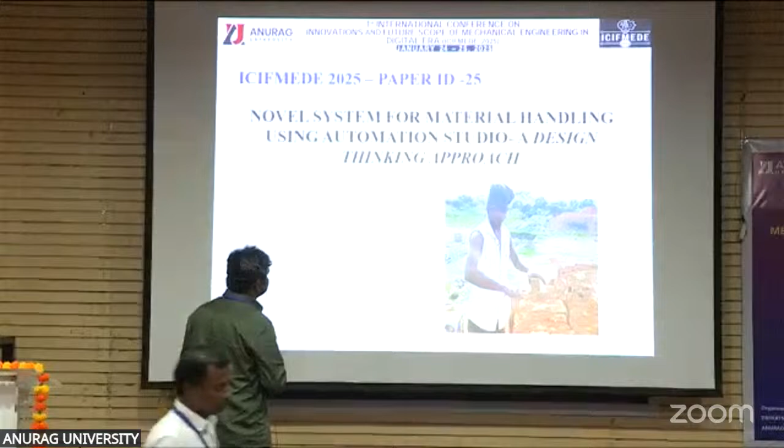I just wanted to share some basic information. Being a mechanical engineer, as sir told, there is AI, but it is not totally applicable for AI to take over mechanical or core departments. So, in line with the topic of AI in everything but not in mechanical, in mechanical, I should be there, we who has to work for the mechanisms.

Ultimately, once you design a mechanism for basic minimum things, there should be minimum contribution from the mechanical engineer in order to design a product. So when you want to design a product, not directly getting back from the engineering aspects, we need to go with a design thinking approach.

What is this design thinking approach? It is a process where you get into the user needs and find out whether it is feasible, viable, and desirable or not. These three aspects are very important in order to design a product.

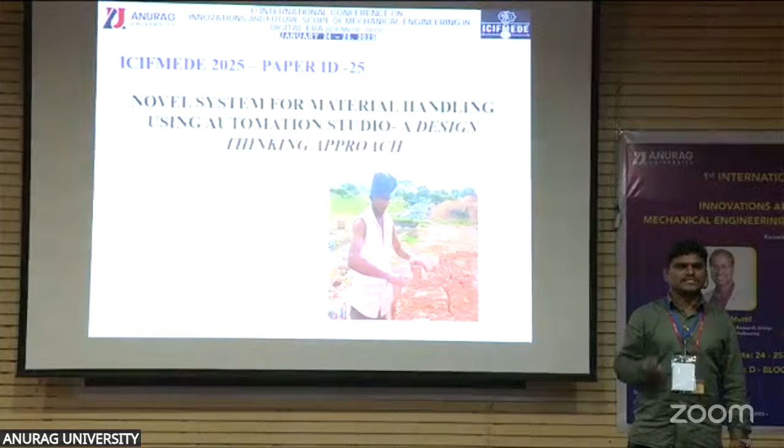This is the work where I have explored novel systems for material handling using automation studio. Material handling, as in the image you can see, is basic work where a mechanical person or a layman is working, but what mechanical engineering contribution can go with this - this is the idea and this is the work.

Getting into this, automation is the era we are in, no doubt about it. So core departments, what we are doing and what is our contribution to society - this is the aspect which every engineer has to question themselves.

Definitely we are here to solve problems in society. So whatever we are doing, the output and conclusion should be to serve the society. This project is going to serve the society and will be helpful by using automation. Again, it leads to AI.

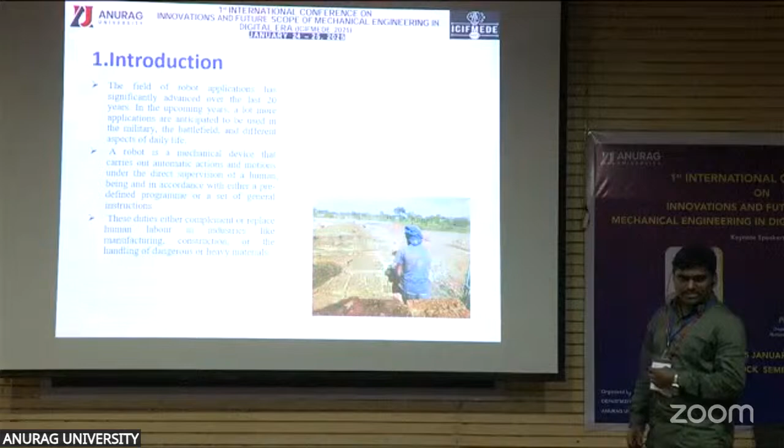Let us see what exactly it is about. The field of robot applications has significantly advanced over the last 20 years. We know that. A robot is a mechanical device that carries out automatic actions and motions under the direct supervision of a human being.

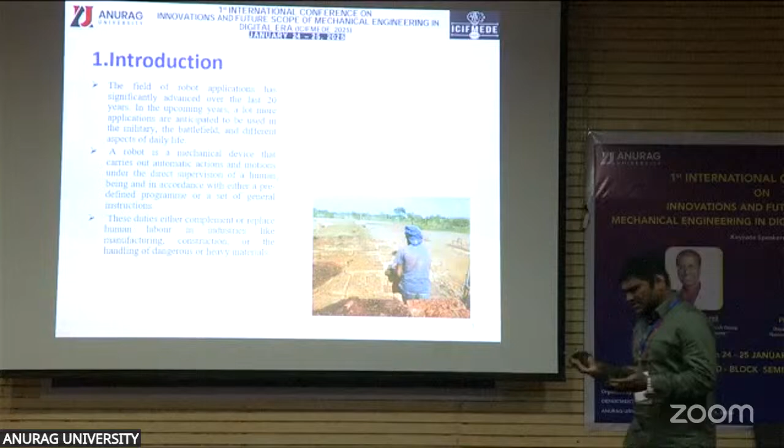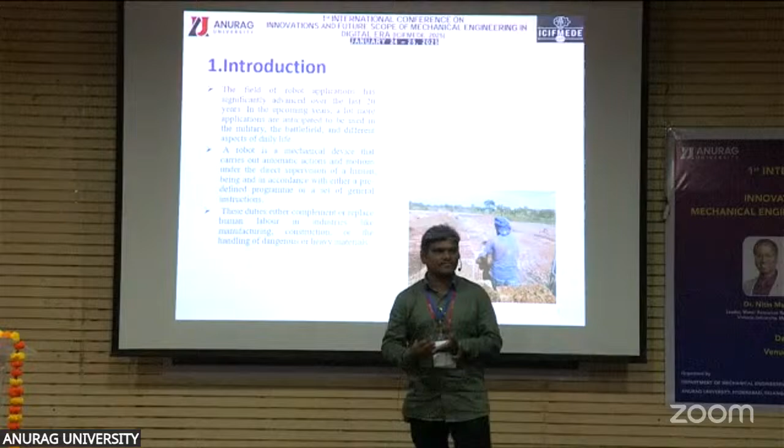Obviously, any automation is nothing but a logic system, from the minds of a human being, no doubt. The only thing is the right path, how you develop a logic, either in the form of PLCs or in the form of an algorithm. The coding system, there are different methods, different means where we can develop any system into automation.

But which one you are using is important, because at the end of the day, whether it is feasible or not - feasible in the sense of engineering aspects as well as economically. These two things are important.

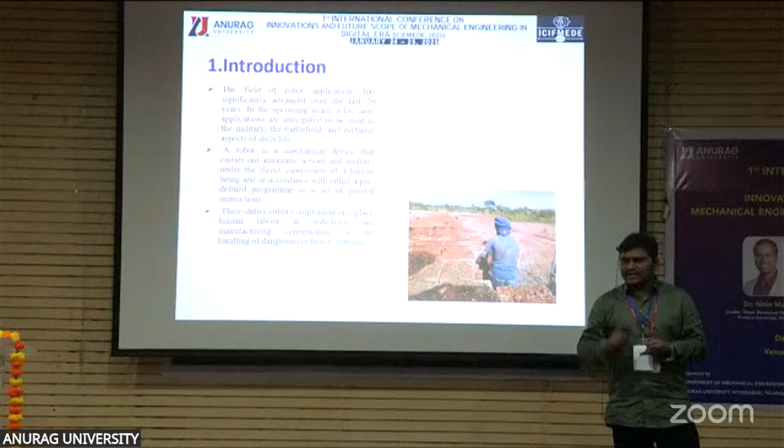And finally, as I told you, desirability. Whether you have a technology and feasibility, but if it is not desirable to the person, then ultimately the product is waste. All these three things have to go together, then only the output will be useful for the end users.

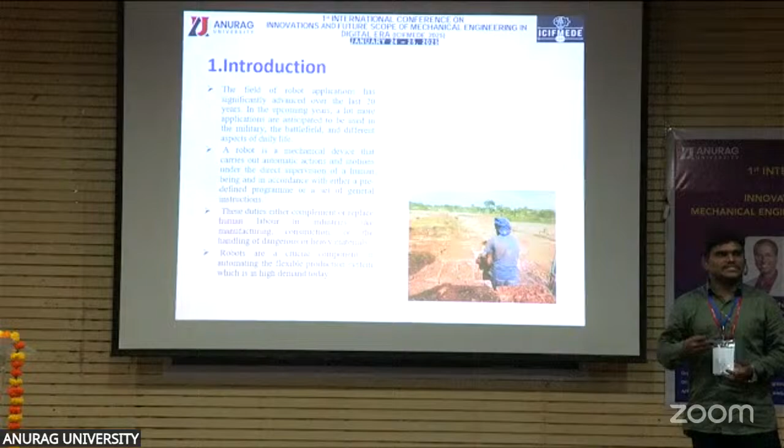Robots are crucial components in automating and flexible production systems. As we've seen in production lines, all are being automated, but what type of mechanism is being used and in advance. Now as we are in an AI era, what are the advances, and whether it is feasible and economical, we have to question ourselves and go into it.

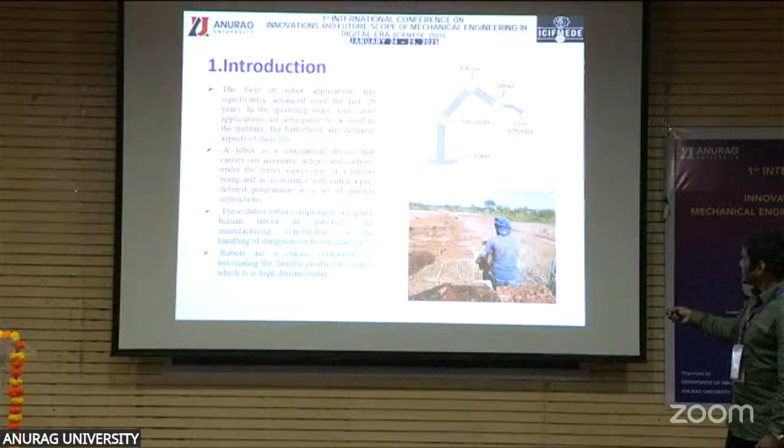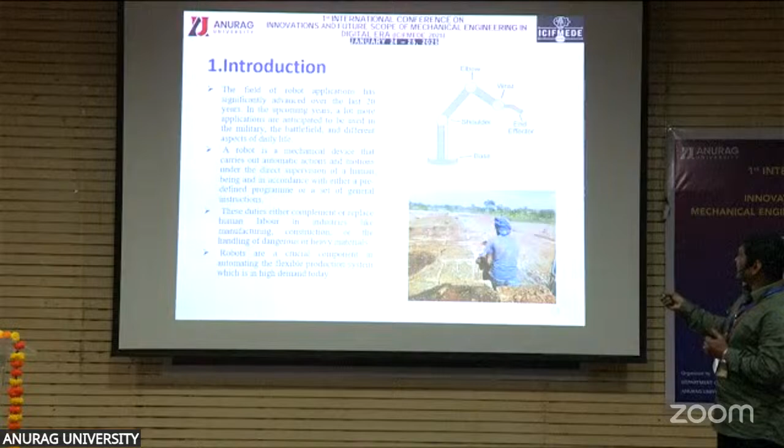This is a basic thing, an articulated robot. This is what I wanted to show you as a showcase. This is the thing we have considered and designed our project on. This is an articulated arm - I don't know how far people know about it, so the basic introduction I wanted to give you. This is a base. We have three different types of joints, and all the joints are rotary joints.

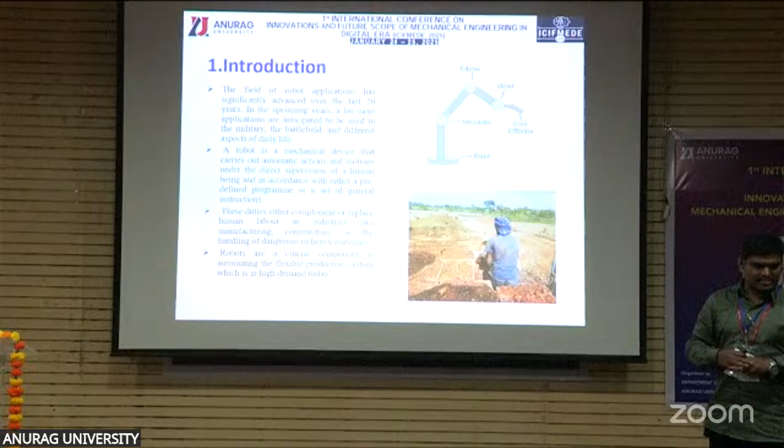Rotary joints and prismatic joints are the two different joints we use in robotics. Based upon the application, which type of joint is being used will be decided by the person designing it.

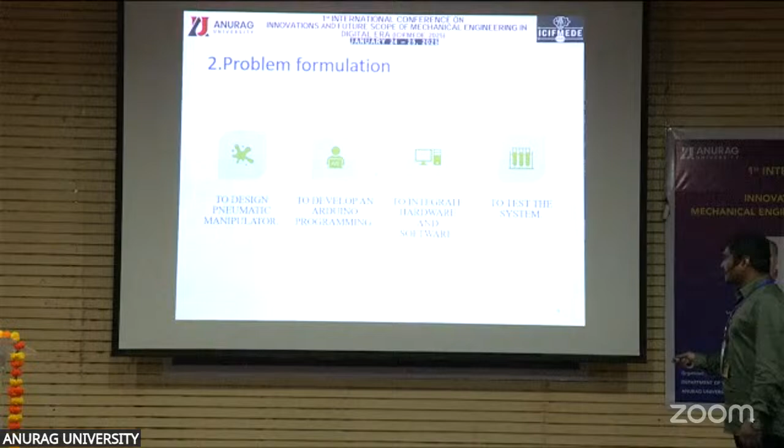Problem formulation: to design a pneumatic manipulator, which we call a manipulator robot. To develop Arduino programming, and to integrate hardware and software to test the system. These are the four different objectives we have designed.

We have designed it using the design thinking approach. In design thinking, there are four important parameters we need to consider for designing a prototype. What are the four? Let me go with this.

The first one is empathy. Empathy, to whom are you going? We take empathy from the stakeholders. Who are the stakeholders? Stakeholders are end users, creators, and in between the marketing people - all these come under stakeholders, where we go on with empathy.

After that, next is defining the problem. After having empathy, because here in our auditorium we have 20 plus students and faculty, and each and every perspective is different, we have to collect all the information. After collecting the information, the person should go with brainstorming, and from all the brainstorming, we have to come up with which one is appropriate, and define the problem.

After defining the problem, next we need to go with ideation tools. Ideation tools are different mechanisms we combine together to get the best output economically. And after that, prototype - having a prototype and testing these things.

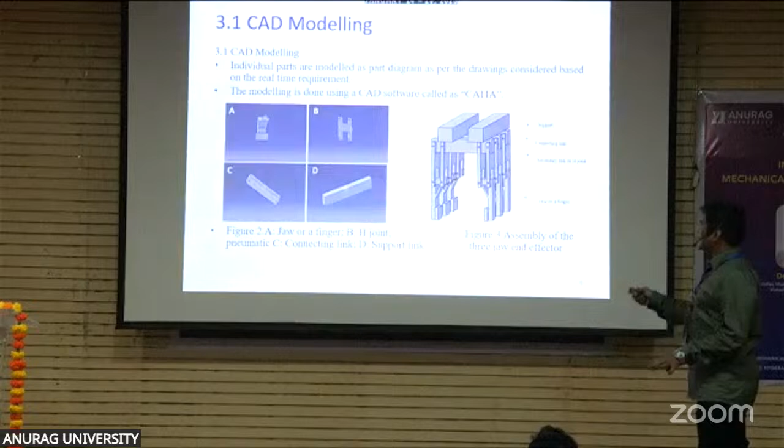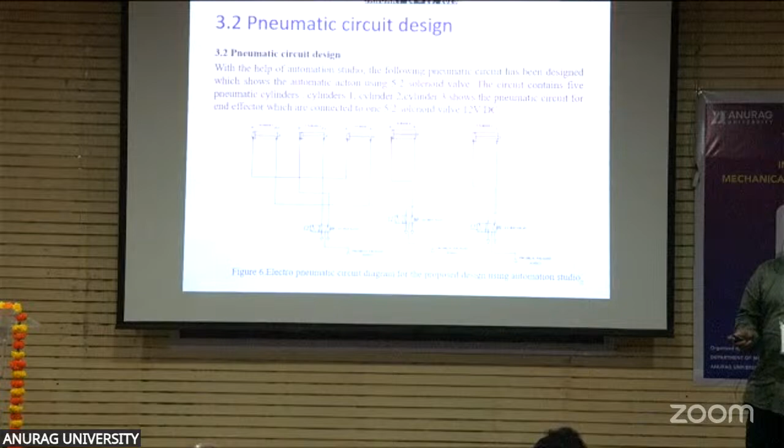Developing it and going directly to hardware may lead to a fatal error, so to avoid that, we go with these software systems. Here cylinder 1, cylinder 2, cylinder 3, cylinder 4 and cylinder 5 are all double acting cylinders, controlled by 5 by 2 DCVs, which are used to control the particular action.

Power mode, better. Presentation mode, better.

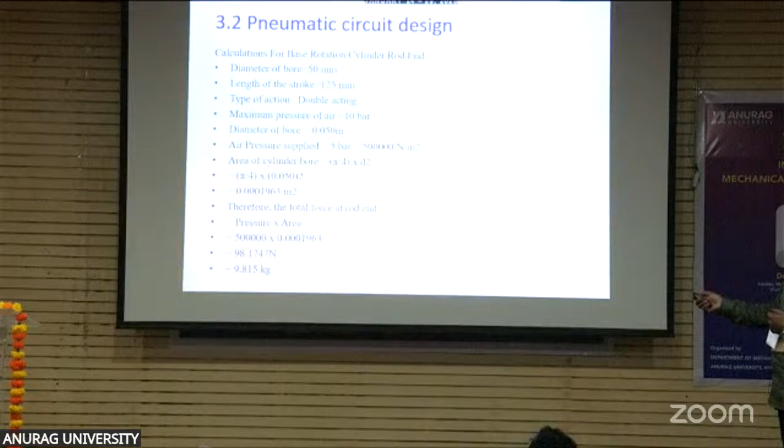As I was talking about the cylinders, each and every cylinder is linked here. I wanted to show you in the prototype which we have developed.

This is the ultimate prototype. Here you can see cylinder 1, cylinder 2 - this is cylinder 2 - and here three different cylinders which have been used for the jaw in order to hold the workpiece.

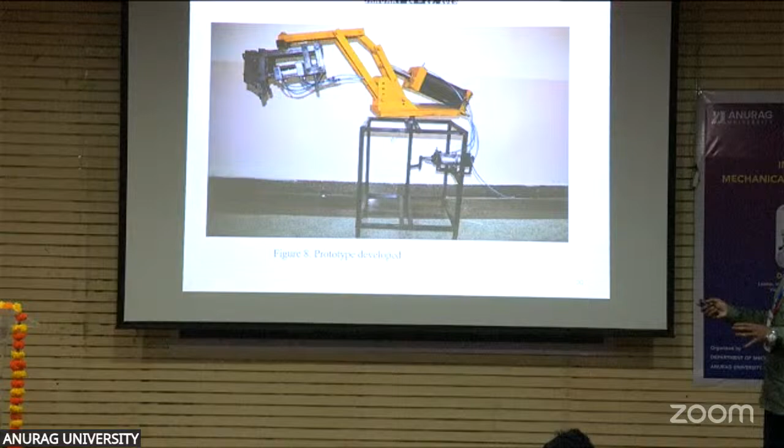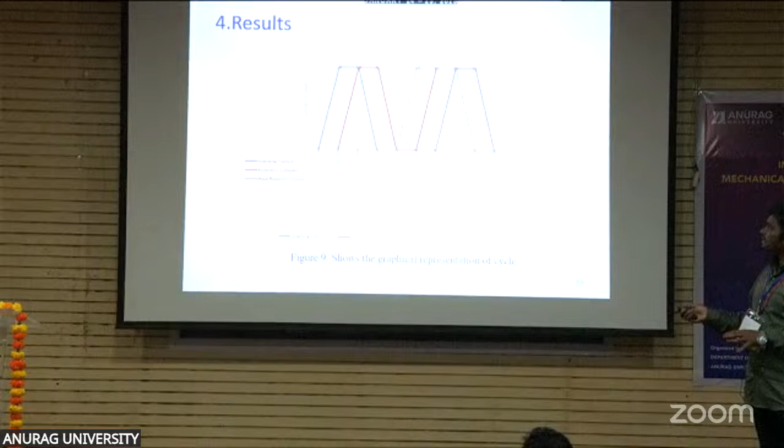Yeah, and this is the time frame extension and all. Time frame for cylinder and its strokes. These are the graphical representations of advancing and retraction of each and every individual cylinder.

This is a prototype, and we have even applied for the patent also. It is under process, so the patent is going on for this.

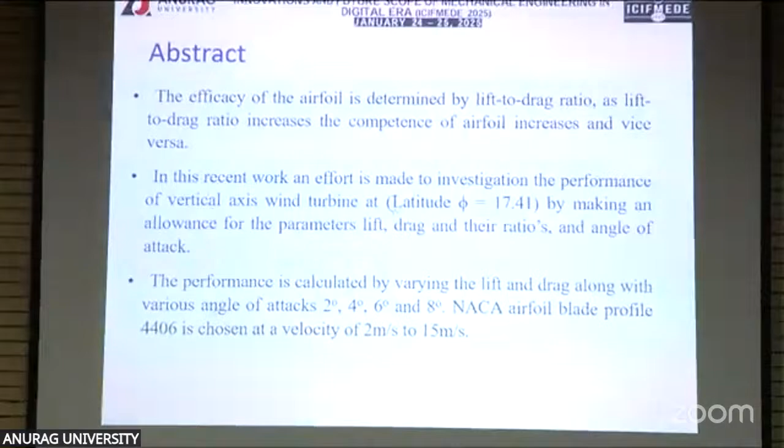So first I performed numerical analysis, then the work was carried out experimentally at that particular location.

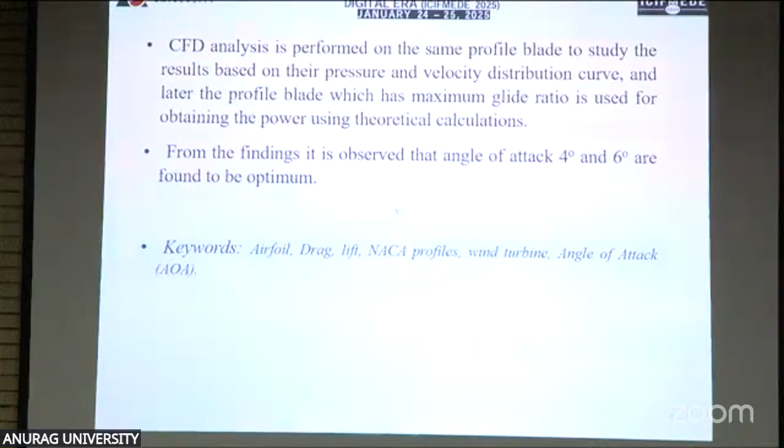CFD analysis is performed. Here in the CFD analysis, a domain is created. The input parameters are given as velocity, 2 meters to 15 meters per second, and angle of attack. The outcome is we got 4 degrees and 6 degrees as the optimum angle of attack, where the performance of the turbine blade 4406 is optimum, with an efficiency of about 30%, considering the Betz limit factor.

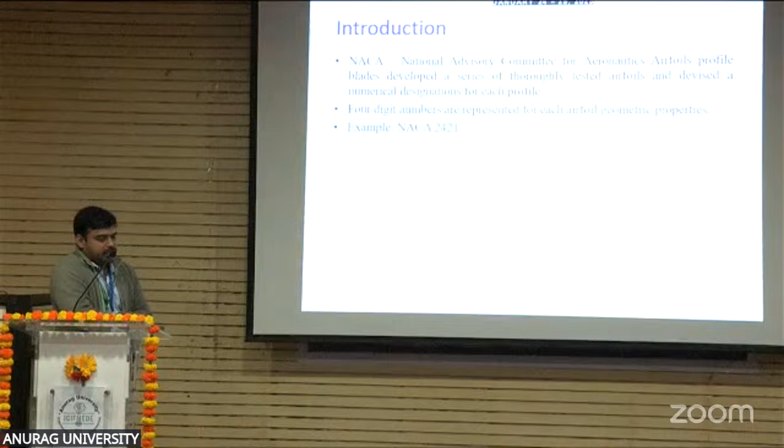Introduction, I utilized a NACA series. What is that? National Advisory Committee for Aeronautics Aerofoil Profile Blades. And here NACA 4406, what is that 4406?

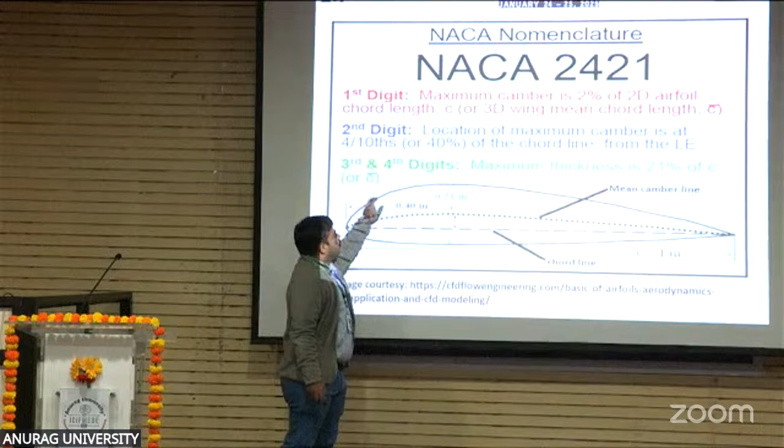An example here is 4406. The first digit is your maximum camber, that is given here, maximum camber height. This is the camber, first digit, second digit, and the second digit is 4, the 40%, and third digit is the total thickness of the aerofoil profile blades.

Using these nomenclatures, we designed various profiles. These profiles are taken from the image courtesy, the manuals of NACA manuals, and the coordinates for the present work, 4406, are taken from the NACA manual and modeled in SolidWorks, imported in ANSYS, that is CFD analysis.

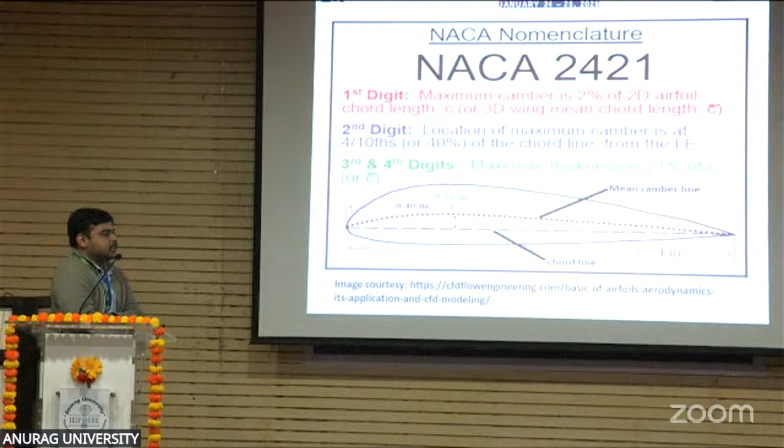A domain is created. So let me go for the literature. This is the angle of attack. What is the lift force and drag force?

Literature survey: in previous literature, they performed tests on 4420, ranging from 5 to 20 meters per second for angle of attack 0 to 20. The outcome was optimum angle of attack of 6 degrees for that 4420 profile at an average velocity of 20 meters per second. And for profile 4412, they performed angle of attack ranging from 0 to 12, and optimum angle of attack was 8 degrees. Thereafter, the L by D ratio declines.

In this literature, low wind speed with Reynolds number 2,32,940, NACA 0015 profile, 17 meters per second, and angle of attack 0, 5, 10, and 15 degrees. They got good results at 15 degrees angle of attack. In a similar way, for the same profile, NACA 0015, with a low Reynolds number, they got 16 degrees angle of attack. So there is a 1 degree difference between higher speed and lower speed.

So the objective of my work is to evaluate the aerodynamic features of a vertical axis wind turbine at a latitude of 17.41 degrees, with an emphasis on assessing the effectiveness of the NACA 4406 blade by adjusting the angle of attack at 2 degrees, 4 degrees, 6 degrees, and 8 degrees.

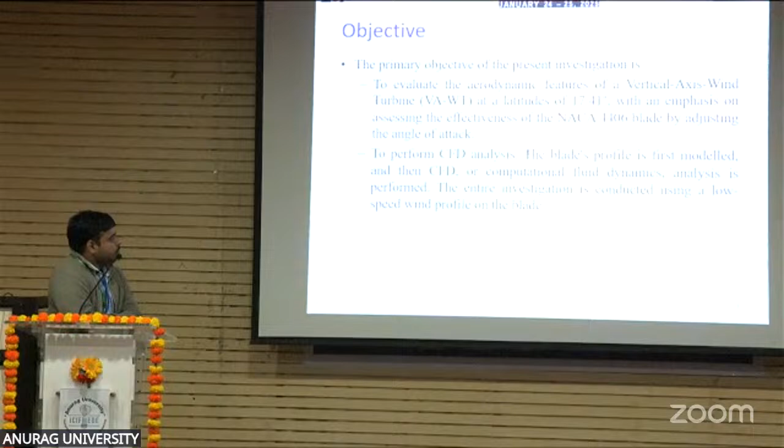So modeling is taken from the NACA standards, and analysis is performed. See here, this is the CFD analysis process. First, the domain is created.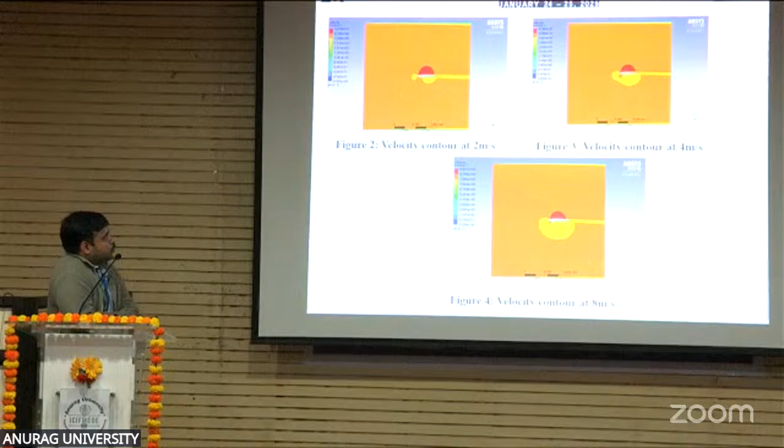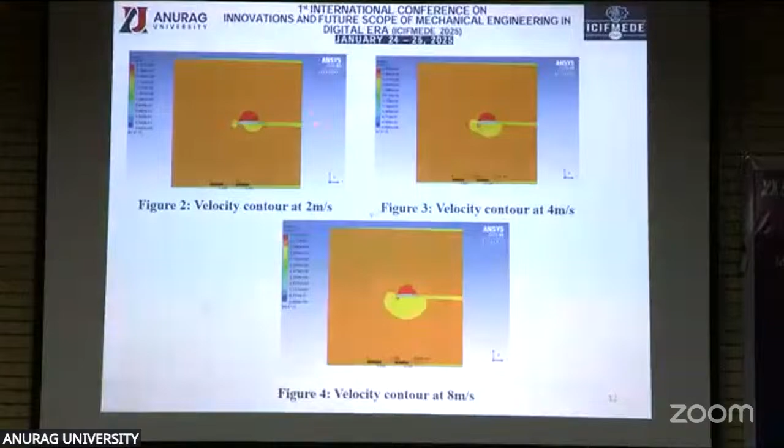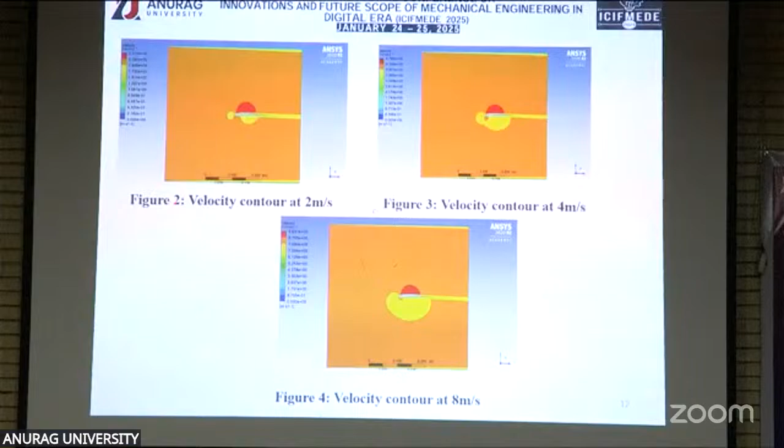So, taking the K epsilon method and giving the input velocity, the material is air. Solving for 2 meters per second, 4 meters per second, and 8 meters per second, we gave the input velocity as 2 meters per second. The output velocity is 2.37, that is a 0.37 increase in velocity. That increase in velocity we are assuming as the rotor velocity for calculating the power.

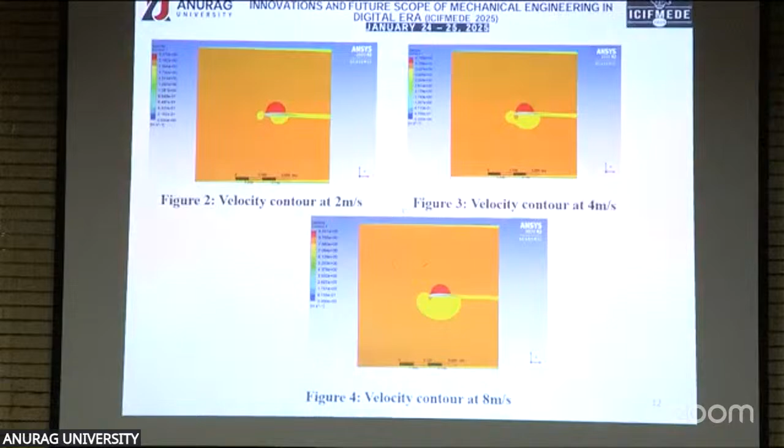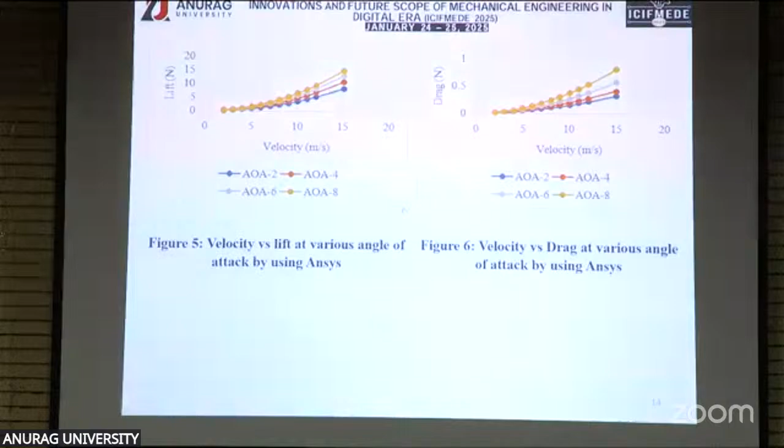From the results and discussion, we can see the lift and drag forces for various angles of attack: 2, 4, 6, and 8. If you perform individually, the higher the angle of attack, the higher the lift and the drag. So angle of attack 8 has the higher lift and higher drag.

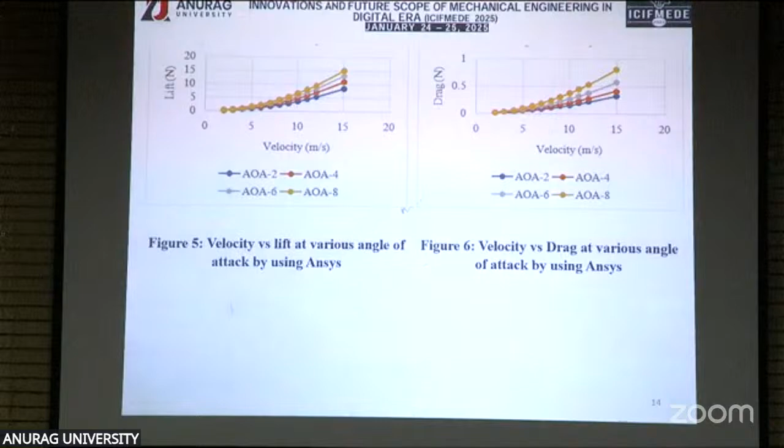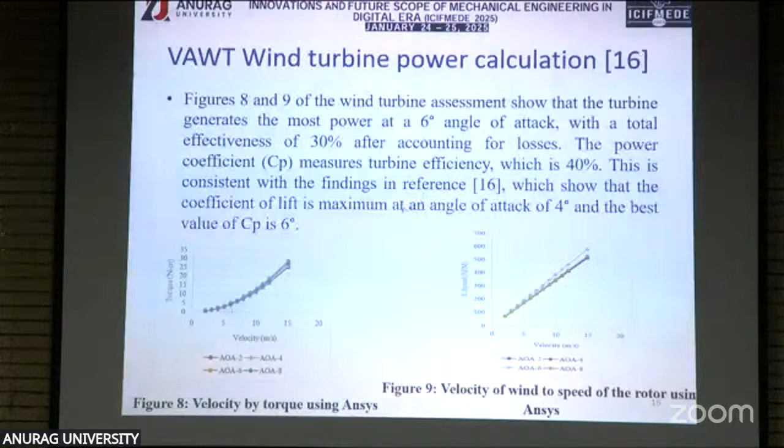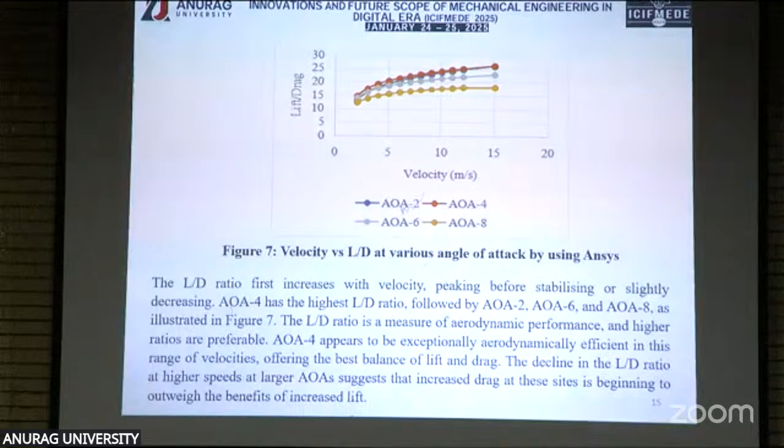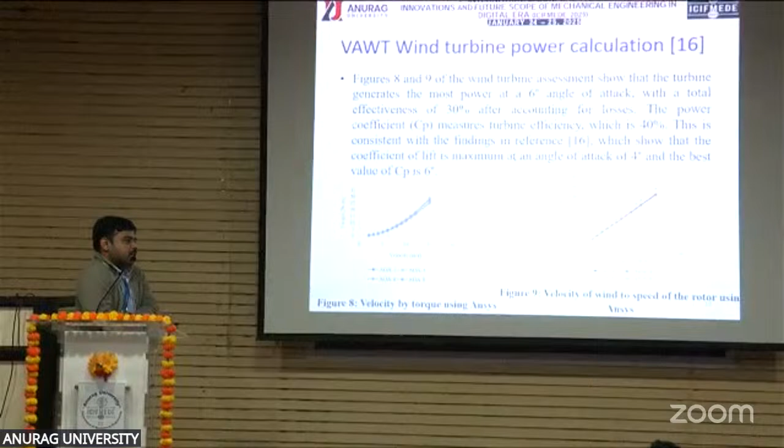And considering the rotor speeds, the increase in speed attained during the analysis is used for calculating the power using theoretical equations. In this figure, we can see velocity versus torque, and velocity versus RPM. These RPM values are used to perform the power analysis. Power is equal to half rho A V cube. From that, we got the power output at an efficiency of the turbine blade of 30%, which matches the same findings observed in reference number 16.

So when we calculated the velocity of the wind rotor speed, we got angle of attack 6 as the highest one. For power calculations, the RPM, the speed, angle of attack is 6.

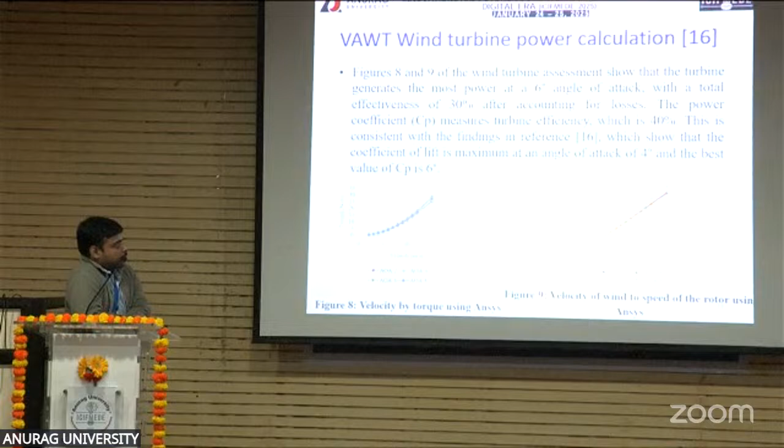Concluding optimum angle for L by D ratios: when considering the lift force to drag force ratio, the angle of attack is 4, and when considering power, the angle of attack is 6. So for NACA 4406 aerofoil profile blade, these two are the optimum angles where we can get turbine efficiency to be 30%, considering the Betz limit factor of 0.593. This observation is crucial to emphasize the importance of maintaining a harmonious equilibrium between lift and drag at this vantage point in order to maximize power output.

The motivation for this project work is to develop an alternative renewable energy source to overcome traditional, conventional energy sources. That is the point we chose for this particular project, and various literature has been carried out, but limited work has been carried out in that particular latitude location.

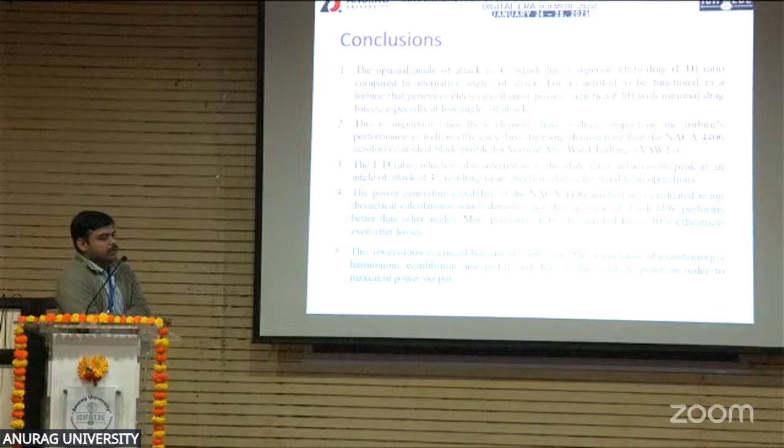So alternate angles I have considered. We can consider from 0 to 20, but a majority of the literature shows optimum angles from 5 to 8 degrees, considering from 0 to 20 based on the profiles. The 0015 profile, for larger Reynolds number it is 15 degrees, and for lower Reynolds number it is 16. For the 4 series, the angle of attack is between 2 and 8.

Maximum in the literature, number 16, they got 6 as an angle of attack, so I increased the angle of attack. Why not 8? Even in my analysis it is proved that 6 is the optimum angle for power calculation. I have not continued further - we can continue from 0 to 20, we can take any angle of attack, but I optimized there itself.

CFD analysis - no, actual analysis has to be carried out. We have a low speed wind turbine in our college.

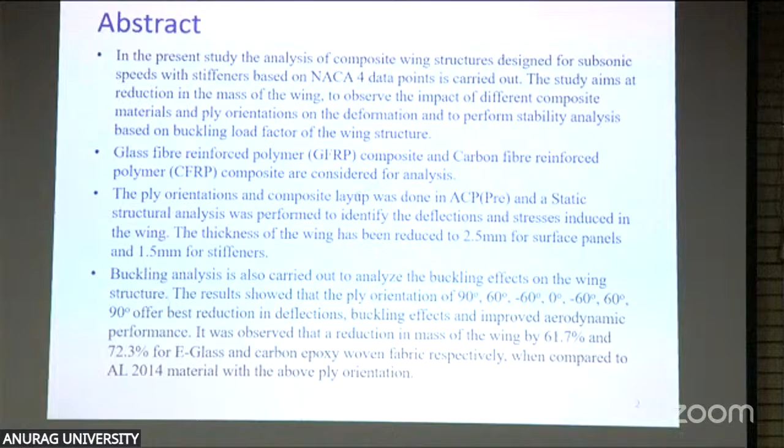As our previous presenter mentioned, most aerofoil profiles have standards, and here the missile wing was modeled using NACA 4 data points. We had GFRP and carbon fiber reinforced (CFRP) composites. Two composites were considered, and the results were compared with the standard aluminum material, AL 2014, which is generally used.

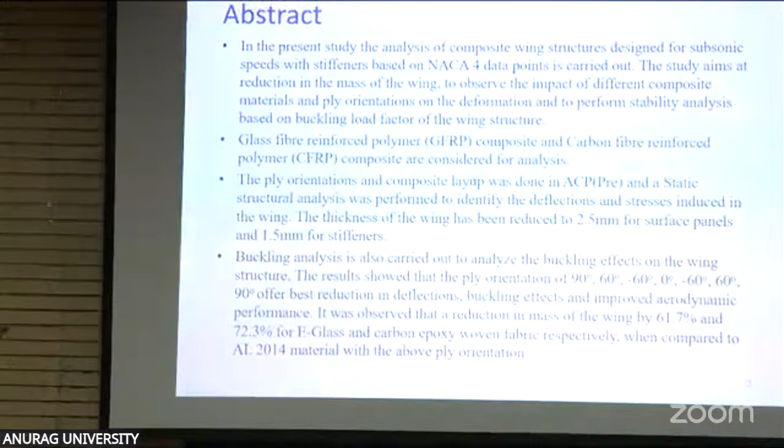As it was a student project, the simulation was done in many steps, varying the thicknesses and ply orientations, to give a clear idea of how to go from a top-down approach for the ply orientation and composite layup.

The ply orientation and composite layup were done with ACP, and static structural analysis was performed to identify deflections. They tried to reduce the ply thickness with various orientations. Buckling analysis was also carried out for different orientations, and mass reduction was observed in the wing: 61.7% using E-glass and 72.3% using carbon epoxy.

Coming to the material properties considered for E-glass and carbon epoxy, these are shown in the table.

Now coming to the ANSYS modeling: initially the model was done in APDL. The initial thickness of the ply was taken around 10 mm, and they brought it down to around 1.5 to 2.5 mm. Initial studies were done with APDL and then in ANSYS Workbench, where the entire structure was converted into a shell model, maintaining the same general procedure.

With the static structural analysis, the deformation was reduced from 18.33 to 8.78 millimeters. Further, ANSYS was performed again with the stiffener occupying the full span, since initially the stiffeners were not applied across the full span of the wing.

With an increase of stiffener length, the deflection is reduced further to 6.65 millimeters. The mass of the wing reduced to 1.7 kgs as compared to 3.5 kgs for the wing with aluminum initially. The results stated that 0 and 90 orientation ply offers better safety against failure conditions, as the reinforcement more effectively takes up the load.

Apart from this, the ply orientation for different angles were also carried out, and we can see the results for the different orientations of the ply. For 30, 60, 90 and 0 degree orientation, there is no improvement with the ply setup, and the deflection has enlarged throughout the wing as compared to the tip of the wing.

When compared to 30, 60 and 90, results show that deflection came around 8.5 millimeters, which is still within the permissible limit. With 0 and 90 ply orientation, we can observe that the deflection was 1.15 millimeters higher compared to the previous ply orientation we did, which was 0, 90 and 0 degrees.

Now coming to the cross plies, which were also studied. The constant thickness of 2mm, down from the 10mm thickness earlier, was used for the plies. For different orientations it was checked, and we can see the deflections mentioned here in millimeters for the cross plies.

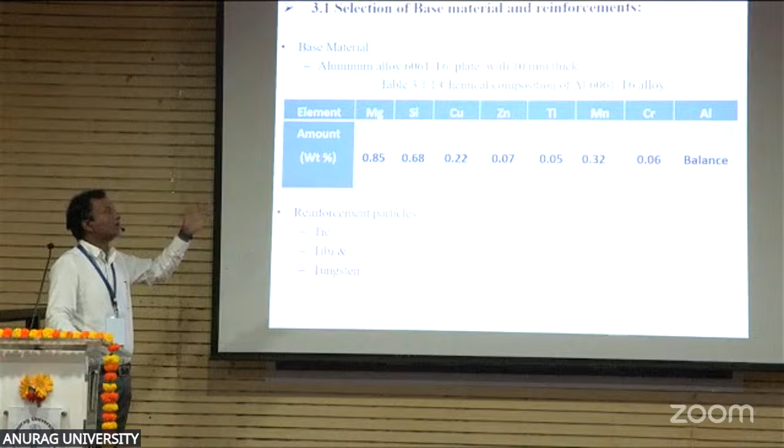Here the chemical compositions we add to the base material are magnesium, silicon, copper, zinc, titanium, manganese, chromium. Apart from this, we are adding some nanoparticles on the surface.

Why nanoparticles? I am adding titanium carbide, tungsten, and titanium boride. The major principle here is that we are reinforcing the materials with a 1mm or 2mm deep groove.

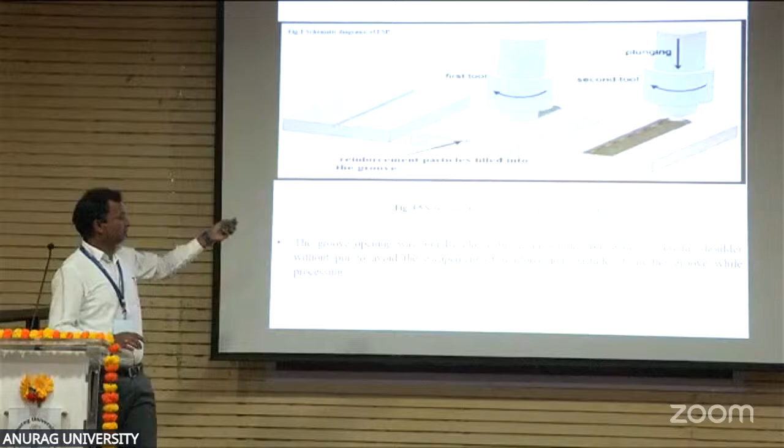In the deep groove, we reinforce the nanoparticles. By adding nanoparticles to the surface composites, we are processing the surface composites by applying reinforcement particles, then we find out some mechanical properties.

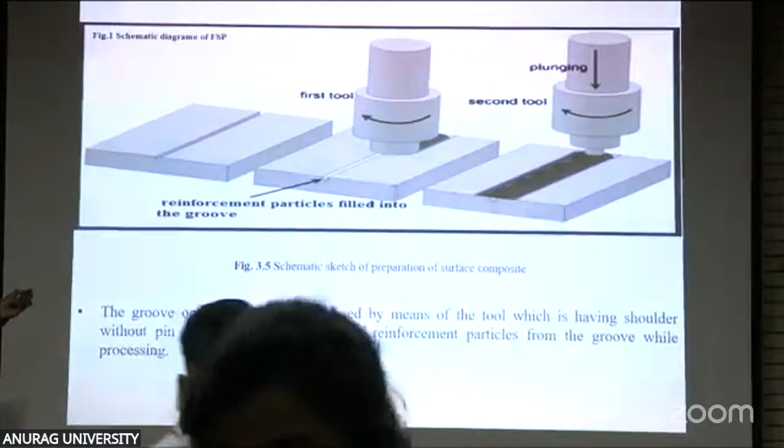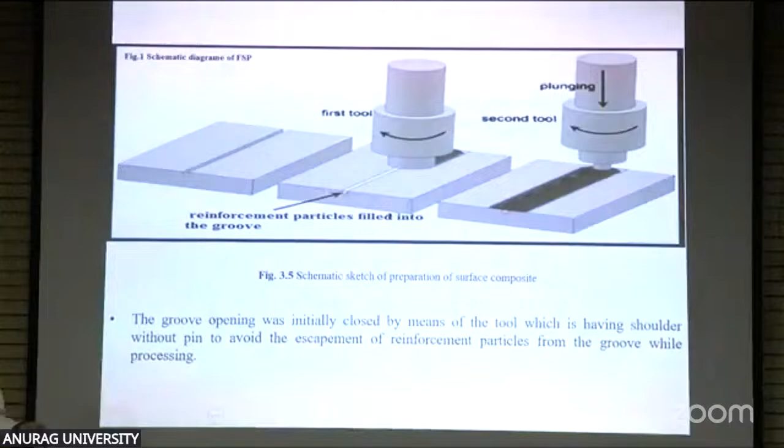The purpose of processing with nanoparticles, simply stated, is to improve mechanical properties in terms of corrosion resistance, surface hardness, and heat treatability. That's why we are adding them.

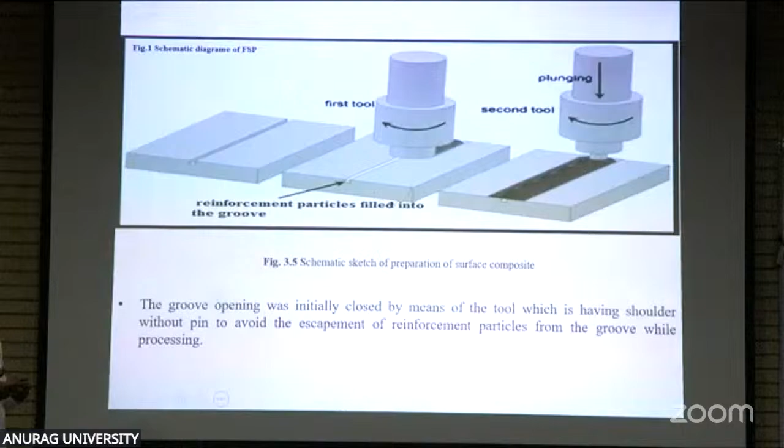After finding the mechanical properties, we optimize the results with optimization techniques. The optimization technique I adopted is ANOVA, or the Taguchi approach. While applying the Taguchi approach, we compare the material manually as well as through the optimization process.

By comparing optimization and manual processes, we can find out which is best by adding nanoparticles. That's what the paper shows.

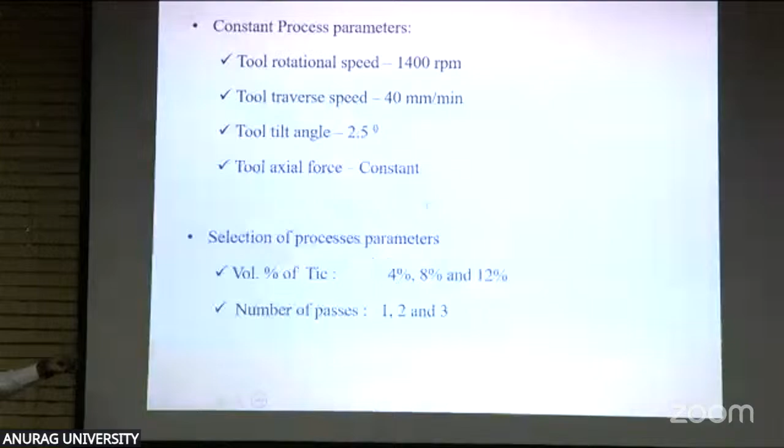The major diagram represents friction stir processing with the help of processing. These diagrams were done at NIT Warangal.

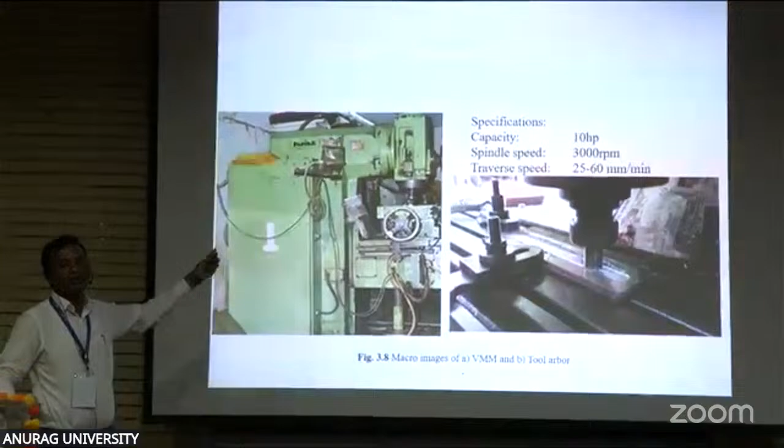Now regarding the number of passes: surface hardness and processing parameters depend on the number of passes. Going from first pass to second pass to third pass, properties keep increasing.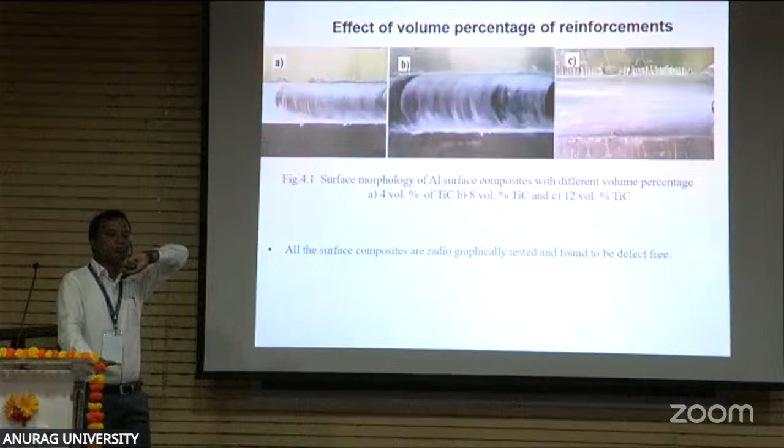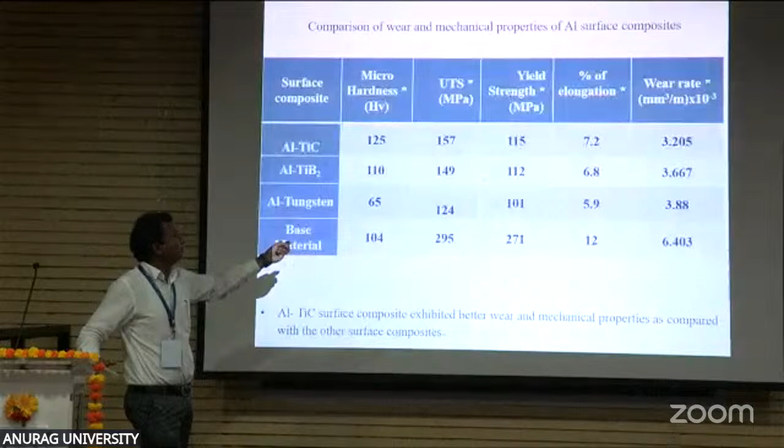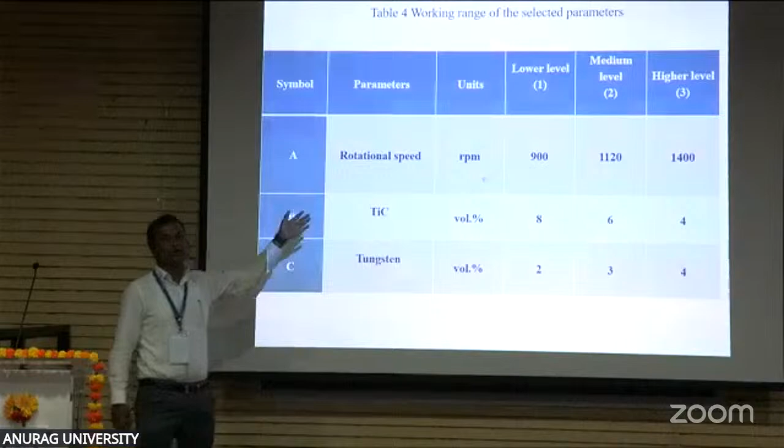While approaching the Taguchi method, these are the process parameters: high rotational speed of 900, 1120 and 1400, with compositions of 2%, 4%, 8%, 10%, or 12% based on requirement.

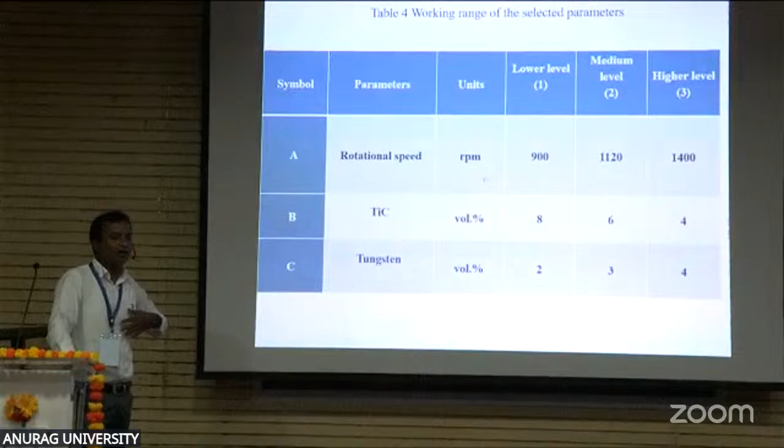But here we take 8%, 6%, 4%, based on our literature review, adding volume percentages of titanium carbide and tungsten. First I consider titanium carbide and tungsten at percentages of 8, 6 and 4.

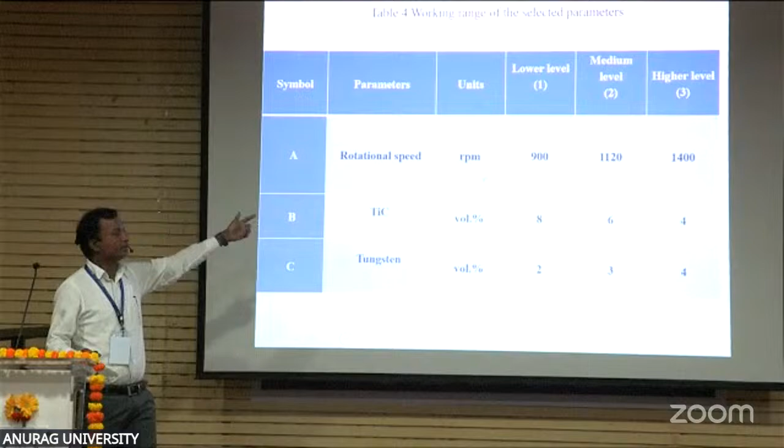We find out the mechanical properties, then go with the optimization process. In that optimization process, we find regression equations. From the regression equations, we determine which is better, and from there we find the optimal solution. These are the major conclusions of my paper.

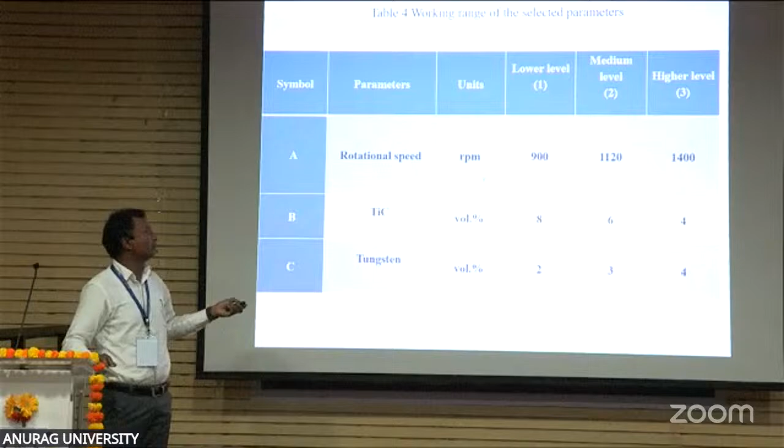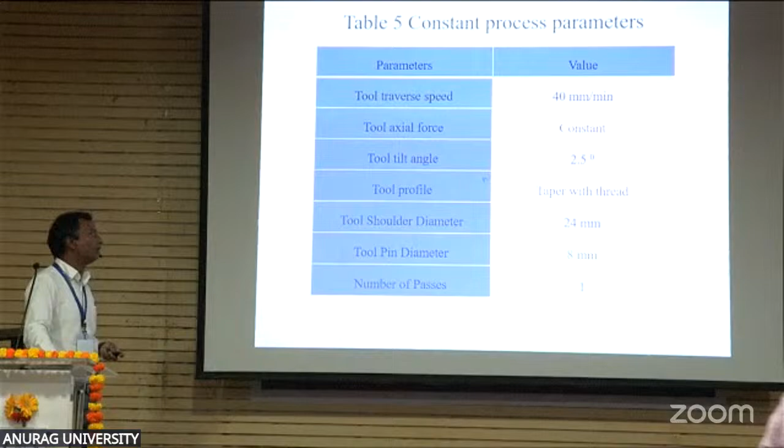So here it shows some results. These are some process parameters of friction stir processing methods: tool traverse speed, tool axial force, tool tilt angle, tool profiles. The tool profile here is taper with thread.

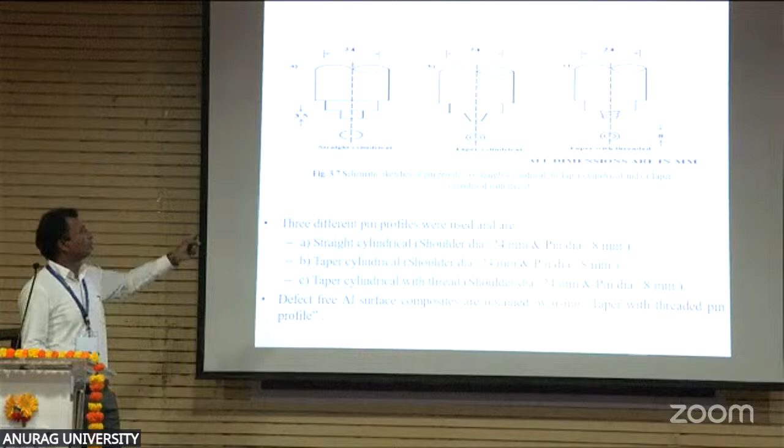Some of the tool profiles we represent here are straight taper and taper with threading, so different pin profiles with different shoulders. Based on these shoulders, we reinforce the materials to enhance their surface properties and process parameters with the help of pin profiles.

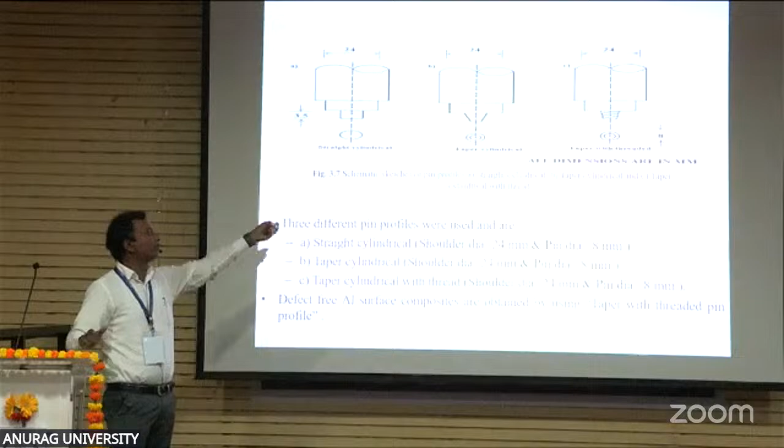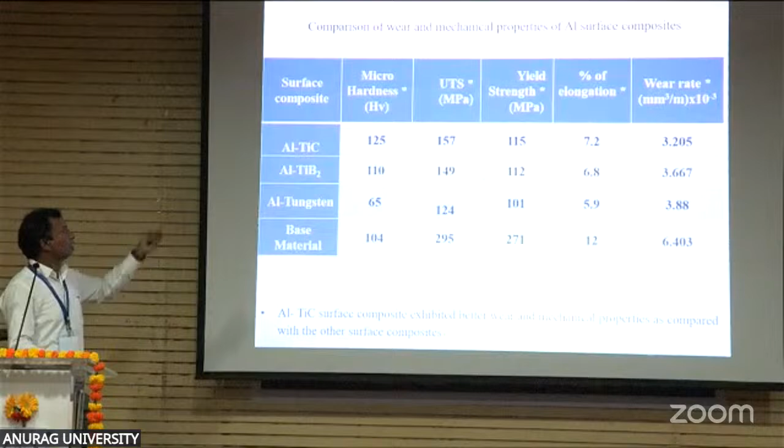Finally, I conclude that based on the results, the mechanical properties—micro hardness, ultimate tensile strength, yield strength, percentage of elongation, and wear rate—were found from different mechanical tests. Reinforcing was done with particles in some cases of titanium carbide and tungsten, and in other cases titanium carbide and titanium boride, and titanium carbide with tungsten, with a minimum amount of nanoparticles reinforced based on their volume percentage.

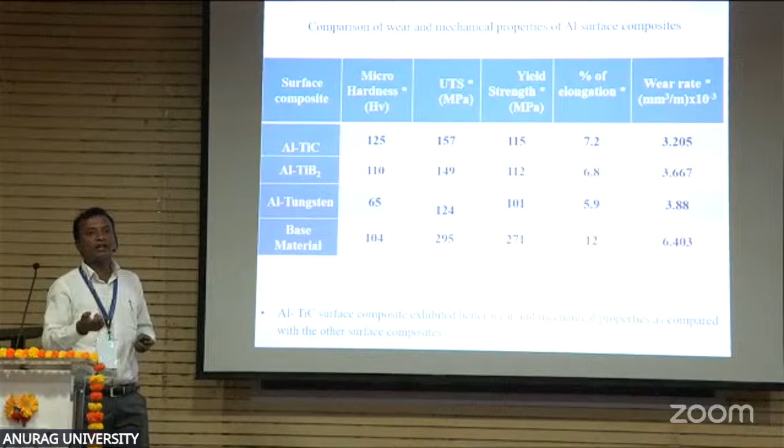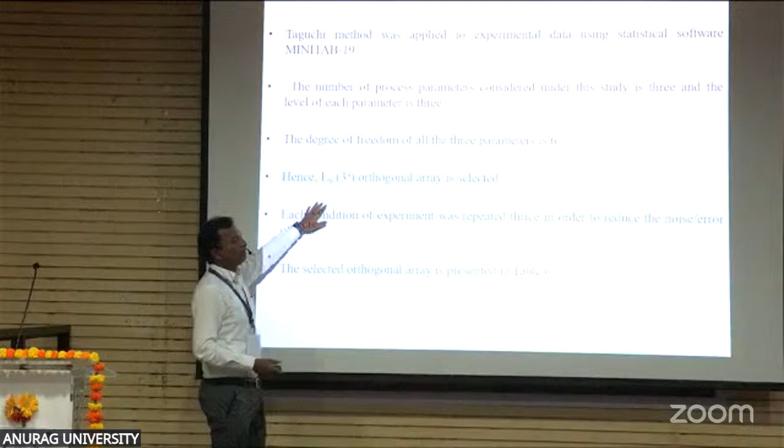Now here, these are the—here it represents your main orthogonal array. So I took an L9 orthogonal array with respect to their percentage of composition.

Then we find out some mechanical properties, then we compare them with the help of the optimizing process. So here are some of the mechanical property results with the help of the base metal, then composite materials.

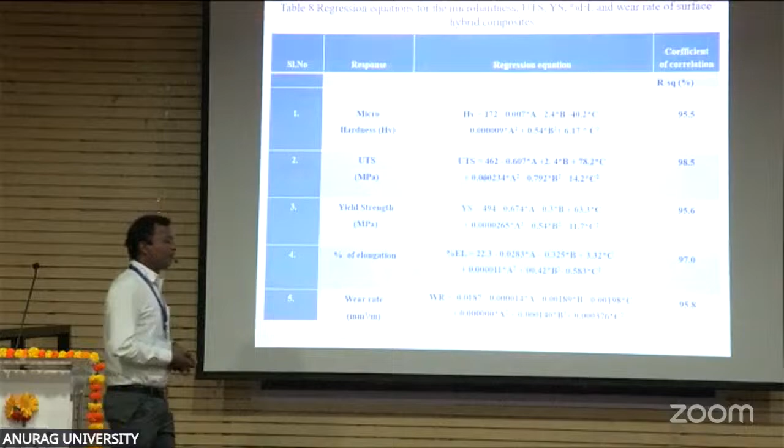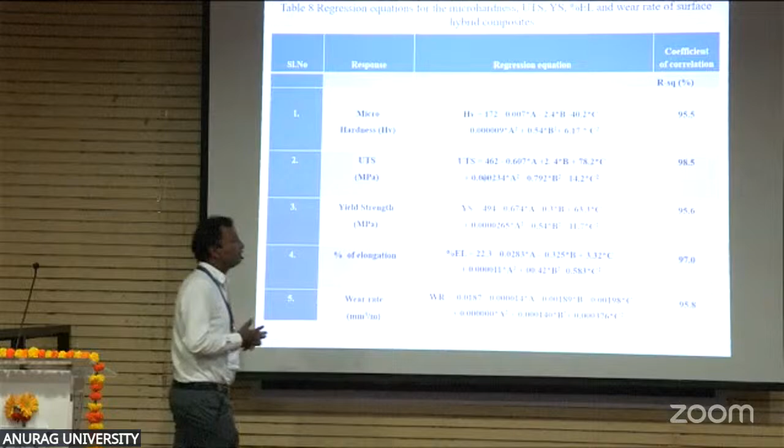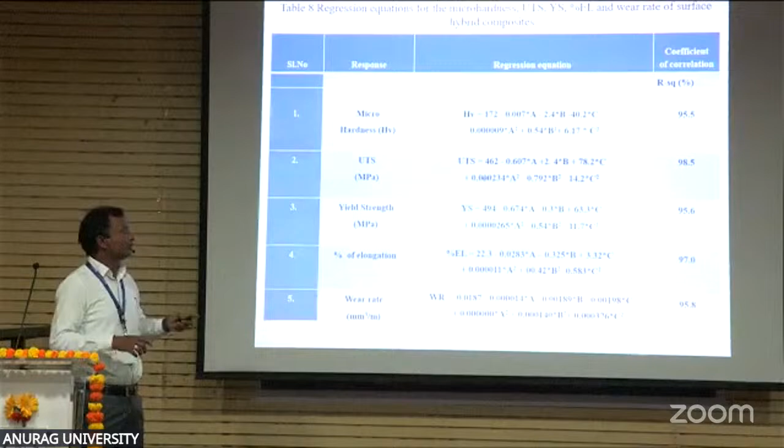Here is the final conclusion: the better the value, 95 or 90 and above, coefficient of correlation, the volume percent is better. That optimization process represents comparison between manual as well as optimization process. If it is based on a regression equation, the percentage 95 and above, the value is good for the test, as well as whatever composition we added to the material—the surface composites are better if we get above the value of 95%.

So there are some extension cases. These are my presentations.